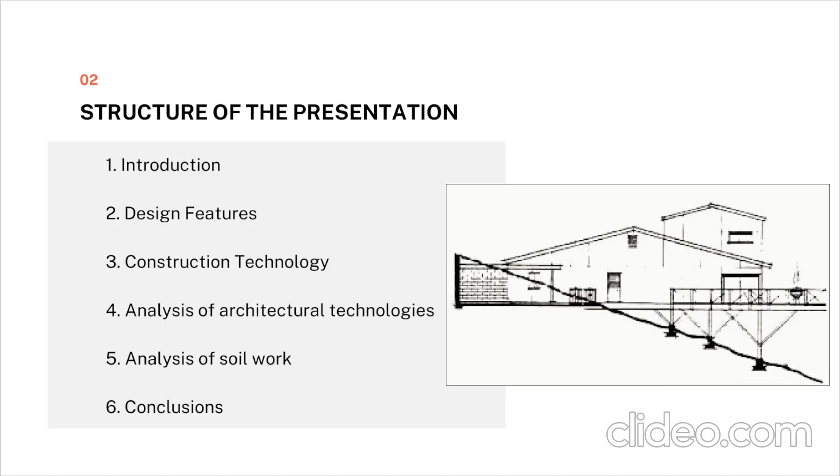Additionally, the paper delves into constructive solutions designed for the long-term operation of coastal construction objects. Illuminating these aspects is a crucial part of the research as they define the scientific direction of the work and indicate opportunities for further advancements in the development and protection of coastal areas. The work makes a significant contribution to understanding and addressing the issues of natural degradation of coastal slopes through architectural innovations and constructive approaches.

Architectural integration of buildings on coastal slopes presents a challenging task that piques the interest of architects and designers due to the unconventional and often demanding nature of the tasks they face. The modern construction industry encounters a myriad of complex challenges related to engineering improvements of coastal slopes. Research in the field of coastal slope engineering holds significant importance for the development and implementation of innovative technologies aimed at ensuring the stability of structures and preserving the natural environment.

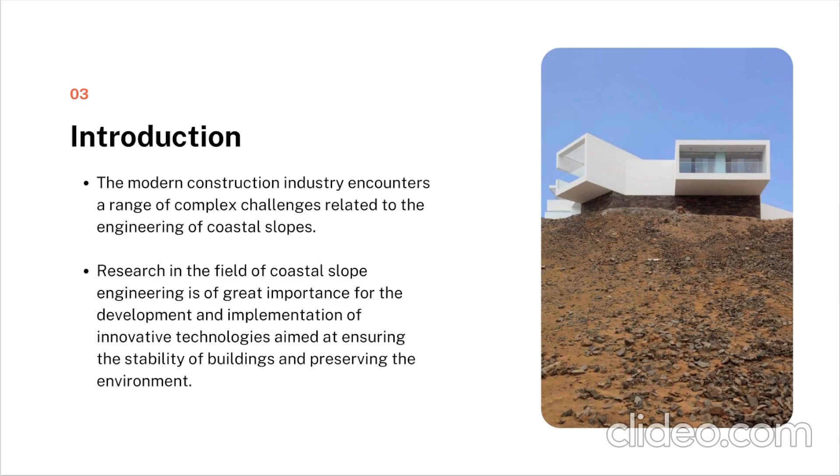The development of such research will help address pressing issues associated with coastal erosion, ensuring the stability of construction works and reducing their negative impact on marine and coastal ecosystems. Houses situated on slopes become distinctive focal points of architecture, given their ability to harmoniously blend into the natural landscape, facilitating a more organic composition as a whole. Over 17% of the population prefers hillside homes, drawn to the architectural uniqueness and complexity which manifests in their organic integration with the natural landscape.

A key aspect of the appeal of such hillside homes is the opportunity to enjoy picturesque views of the sea, lakes, rivers, forests, and mountains, providing aesthetic pleasure and panoramic observation points. Innovative landscape design solutions become an integral part of the overall image, creating an attractive landscape with relief, variations, and slopes. However, the process of building foundations on terrain with features such as coastal slopes encounters several difficulties.

Coastal waterlines, whether natural or artificial, are subject to destructive factors such as wind, precipitation, and water. Tides, floods, and other natural phenomena contribute to processes of degradation that can have adverse consequences. Destruction is caused by various natural phenomena such as waves, water surges, eddies, and zigzagging sections of the watercourse, and so forth. Preserving sensitive soil through its stabilization has become a priority task. To mitigate these problems, measures need to be taken for the reconstruction and reinforcement of coastlines.

Special attention is also given to protecting the soil, a valuable resource that plays a crucial role in maintaining biodiversity and carbon balance. Soil erosion caused by the influence of wind, rain, and gravity becomes a pressing issue that requires stabilization and protection in various sectors, from agriculture and private projects to the oil and gas industry, from protecting coastlines to recovery after natural disasters.

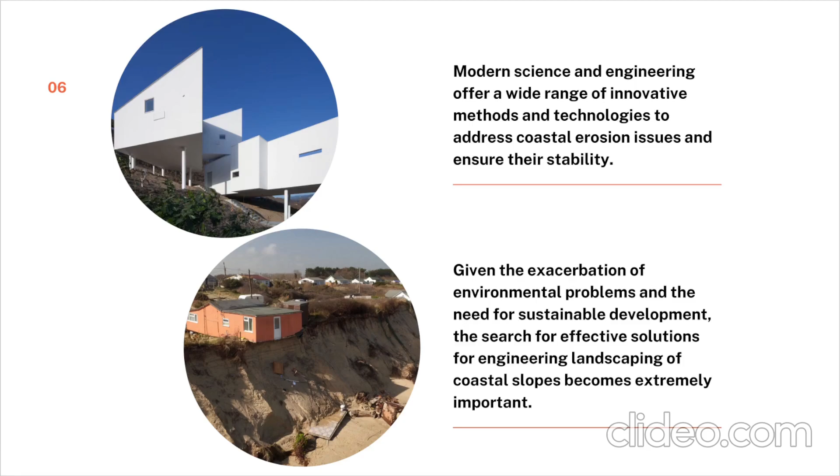In terms of construction, building technology on slopes requires some special approaches to ensure stability and safety. When introducing a building on a slope, it's important to consider the specifics of the soil and landscape to avoid potential stability issues with the building.

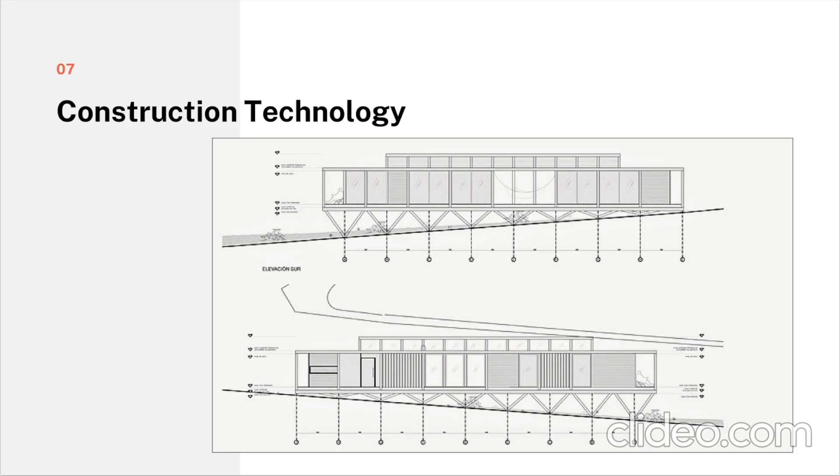Unevenness in the terrain can cause difficulties in evenly distributing the load on the building's foundation. This can lead to improper settling, tilting, and the appearance of cracks in the buildings. Therefore, it's essential to consider the characteristics of the foundation first and foremost. The use of different types of foundations may be necessary depending on the soil characteristics and the steepness of the slope.

Cascade foundations, for example, can be a beneficial option for ensuring even distribution of load and preventing building slippage, as well as for achieving maximum uniformity in the depths of support areas. Developing proper site geology and conducting engineering geological surveys are crucial in this process. Only a thorough analysis of soil structure will allow for selecting the optimal foundation type for a specific location. Highly skilled experts with deep knowledge of soils and their properties are required for implementing such projects.

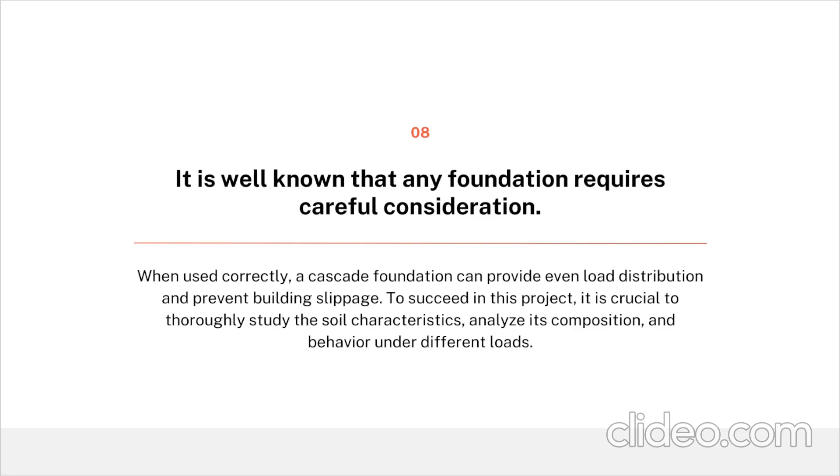The analysis of architecture technologies for building on slopes relies on a thorough study of the specific characteristics of this type of construction. Considering important rules and their compliance with the specific conditions of the site is crucial in ensuring the most reliable foundation structures. The steeper the slope, the greater the risks regarding soil stability. In the case of a slope within 10%, the soil tends to be more stable.

During the analysis of architecture technologies for building on steep slopes, the primary focus is on studying methods of soil stabilization and increasing slope stability. One approach is the use of geotechnical systems, which involves the use of geosynthetic materials and engineering structures to engage soil drainage and prevent erosion.

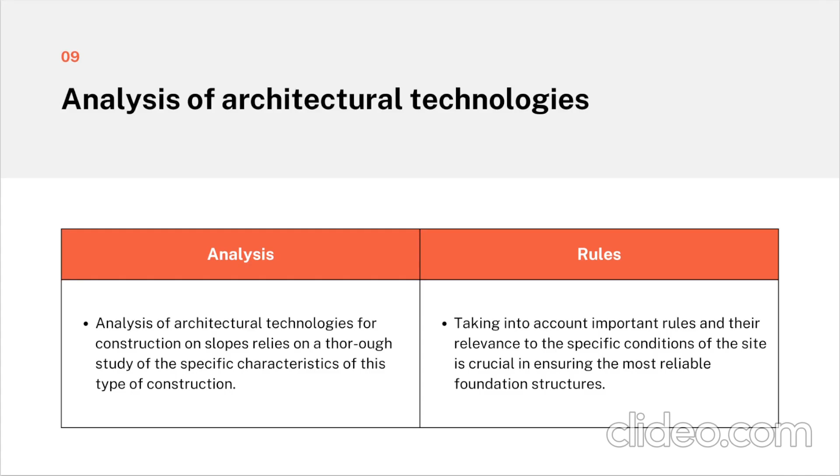One possible method of construction on slopes is the use of cascade foundations. This method involves placing foundations at different levels, allowing for even distribution of loads and ensuring structural stability. However, drawbacks of this method may include complexity in execution and high construction costs.

Another common method is the use of pile foundations on driven reinforced concrete piles. This approach effectively addresses issues with weak soil, ensures structural stability even on slopes with significant height differences and rising groundwater levels in hard-to-reach areas. However, successful application of this method requires additional soil investigations and consideration of site-specific characteristics.

For a site with varying heights, pile foundations on driven reinforced concrete piles are the most optimal option for implementation. Ensuring a horizontal plane for the foundation on a sloped site is only possible by smoothly adjusting its height. For sites with significant slopes and problematic soils, pile foundations on driven reinforced concrete piles are the right choice. Problematic soils refer to soils prone to seasonal heaving, saturated with moisture, and challenged by significant frost depth.

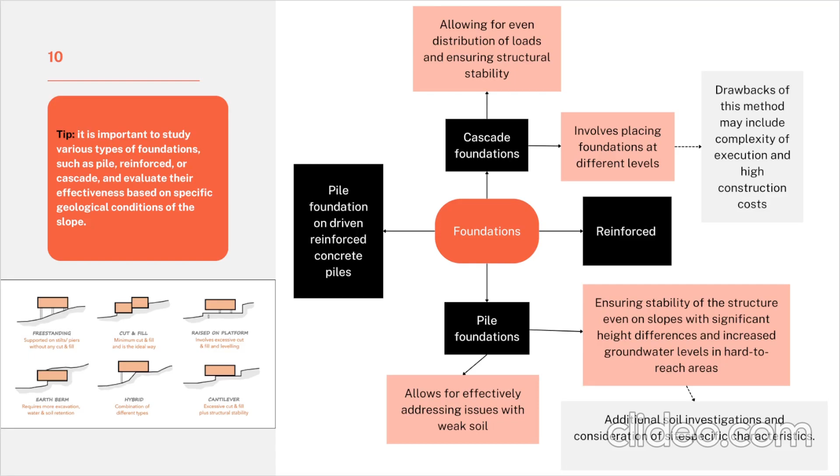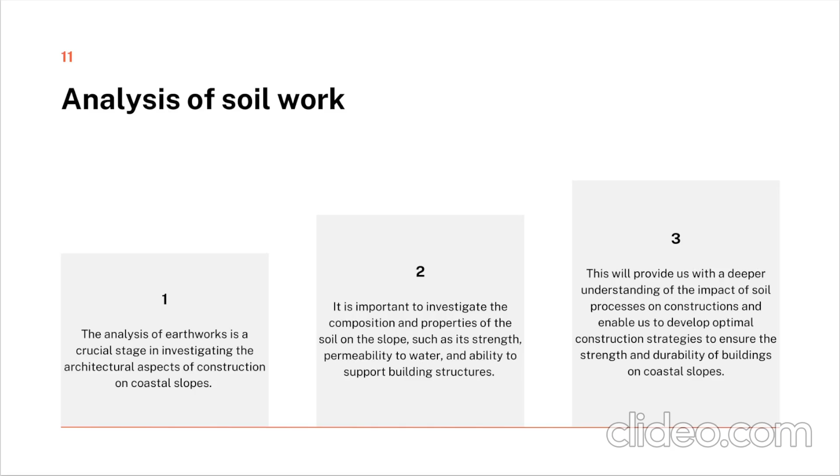The analysis of soil works is a crucial stage in investigating the architectural aspects of construction on coastal slopes. In this subsection, we will carefully examine various aspects of soil works, including site preparation, soil stabilization, and erosion protection. This will provide us with a deeper understanding of the impact of soil processes on structures and allow us to develop optimal construction strategies to ensure the strength and durability of buildings on coastal slopes.

Researching the architectural aspects of construction on coastal slopes has proven to be a complex and multifaceted process requiring the integration of knowledge from geology, engineering, and architecture. The main objective was to determine optimal methods and construction technologies that would ensure the strength, stability, and durability of buildings on coastal slopes.

Therefore, the development of constructive solutions for construction on coastal slopes requires a comprehensive approach and careful analysis of geological, engineering, and architectural aspects. This research helped understand the complexity of this task and develop optimal construction strategies to ensure the stability and safety of building structures on the coast.